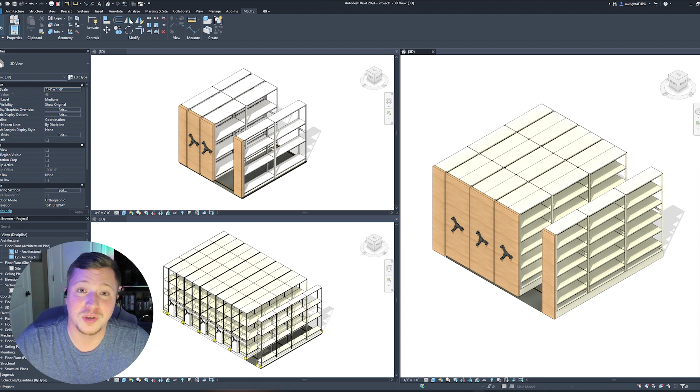For those who don't know, high-density mobile shelving is a system of carriages carrying shelving units on tracks. This technology enables the shelves to take up far less space by collapsing shelving units together instead of having an aisle in between every bay of shelves. To access a particular row, the user operates the mechanical crank or the powered motors to move the shelves to open an aisle.

These systems are enormously complicated and can be overwhelming for an architect or space planner to design without outside help. Considering this, we set out to build a high-density model that uses easy-to-understand parameters that guide the decision-making process of a designer to output the system that meets the design requirements and the manufacturer's specifications. We wanted the models to include as many options as possible while using a systematized approach to draw each system accurately. We also wanted to observe some standard drawing practices for these systems so the plan could be viewed and read correctly. To put it into one sentence, the overall goal was to develop a model flexible enough for design, but precise enough to represent the real-world product with all its intricacies accurately.

As you can imagine, we faced a few challenges. There was a lot of data to juggle between rail types and heights, different guidance systems, carriage heights and maximum lengths, operation types and shelving options, and so on. In addition, Revit has its own constraints that we have to live within. For instance, Revit arrays have stringent rules that don't allow for arrays of less than 2. Arrays must also be consistent between all array members. That means the options applied to the first mobile carriage must carry through to all the carriages. Further, arrays and nested families and many nested components can quickly bloat the file size beyond usable.

Let's take a look at the new standard 4-post high-density family to see all this planning in action. Standard high-density is the most common mobile shelving system people may be familiar with. It's used in virtually any situation where lots of storage is needed in the least amount of floor space. Businesses, libraries, museums, police evidence lockup, medical administration, retail, and many more markets use the storage solution for storing files, books, artifacts, evidence, patient records, inventory, and so much more. Some college and professional sports teams even use these in locker rooms to store jerseys, helmets, towels, shoes, and equipment close at hand.

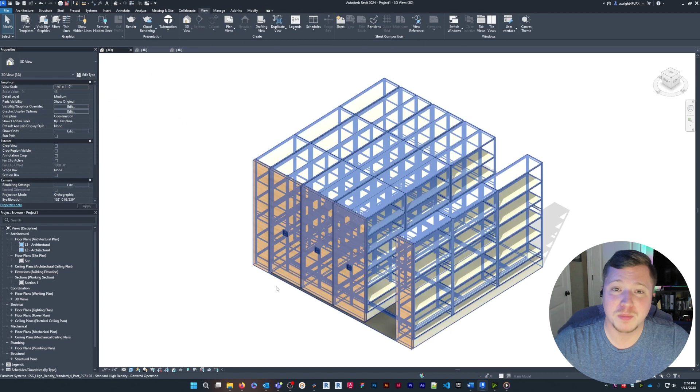Our standard high-density model features independent left and right static units, with options for stationary units on a platform or on the ground. Manual, mechanical, or powered operation, adjustable aisle spacing, rail and floor options, attractive laminate end panels, and 4-post shelving also come included. As with all families in the Fetch library, this model is on the Categories tab. You can find it under Furniture Systems. Click on the picture, then click into the Revit project to place. Clicking on the model will show all the parameters in the Properties window.

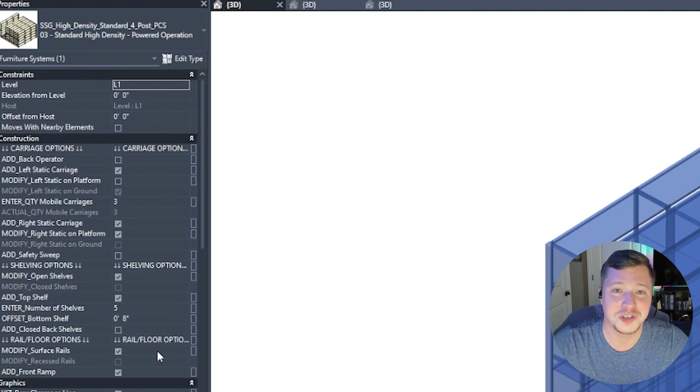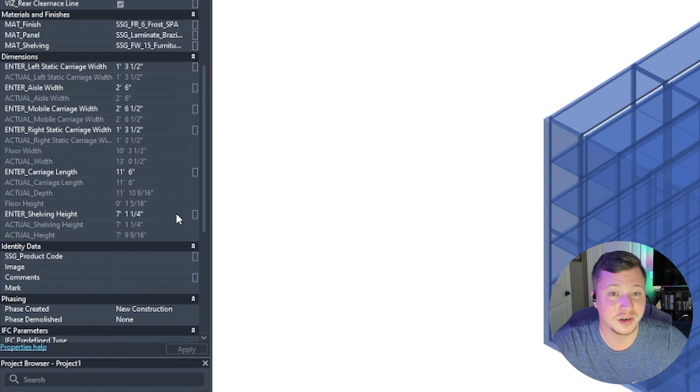Starting in the Construction category, we have all the checkboxes and integer spinner parameters for selecting options such as left and right static units, and the number of mobile carriages, rail and floor options like surface or recessed rails, and the shelf options you would typically find on our 4-post shelving family. After selecting your options, the Dimensions category includes all the dimensional settings for the system. Here you can enter the carriage widths for the left and right static carriages, the mobile carriage width, and the overall carriage depths. The aisle space and shelving height are other dimensions to consider here. Once you have considered all these decisions, the family will automatically adjust to reflect your choices. And that wraps up the standard high-density family.

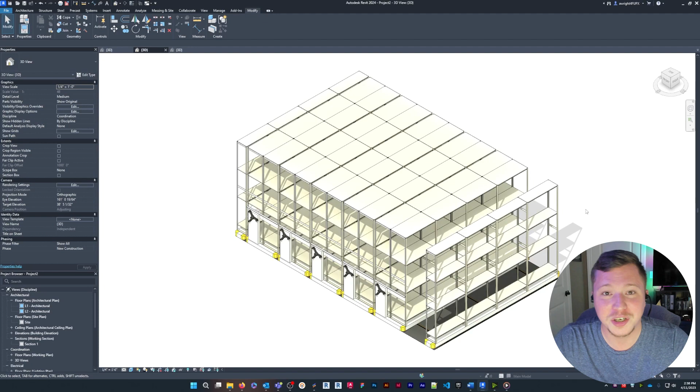But what if your storage needs are more intense than the standard mobile shelving system can handle? That's where the industrial model comes in. Industrial mobile shelving is often found in warehouses, off-site storage facilities, and other settings where high-capacity storage is needed in a small footprint and can hold archived records, materials, shop equipment, and so much more. Our industrial high-density model features 3 types of carriage for increasing weight capacities: independent left and right static units, mechanical or powered operation, adjustable aisle spacing, appropriate rail types, and optional secondary operators on the back of the carriage.

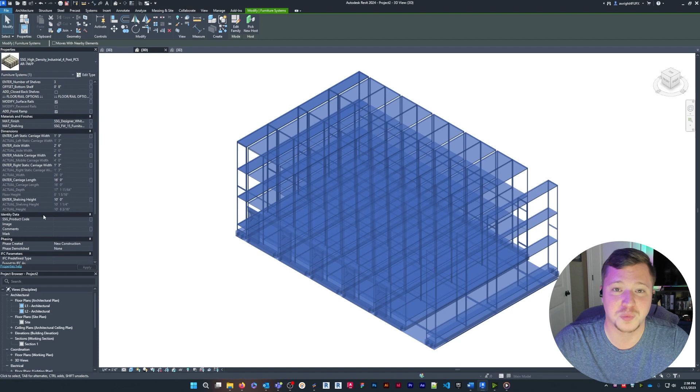To use this family, insert it into your Revit project as before. The properties and parameters for this family are essentially the same, except this family has 3 types for increasing weight and length capacities. Like the standard high-density family, the construction category has many checkboxes and integer spinners for selecting the various add-in options. The dimensions category is where you can enter the width, depth, and heights you desire to output the finished mobile shelving system.

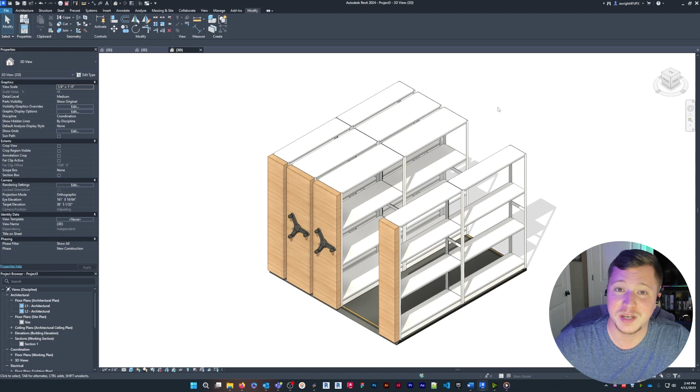Our last mobile shelving family is low-profile high-density. This system is perfect for storing large, bulk items that don't require a high-capacity rating and are often smaller than standard or industrial families. Low profile is typically used in business administrations, school or patient record keeping, and retail storage, especially for picked inventory. This low-profile shelving model includes many of the same options from the previous two families: independent left and right static units, static on platform or on ground, adjustable aisle spacing, and all appropriate rail types and floor options. To use this family, simply insert it into your project like any other Fetch family. The usual properties and parameters are in the Properties browser under Construction and Dimensions tab. Select your desired options and sizes, then hit Apply to see the finished product.

So that's how we set out to make the best high-density mobile shelving models. Use these to design almost any system with ease quickly.